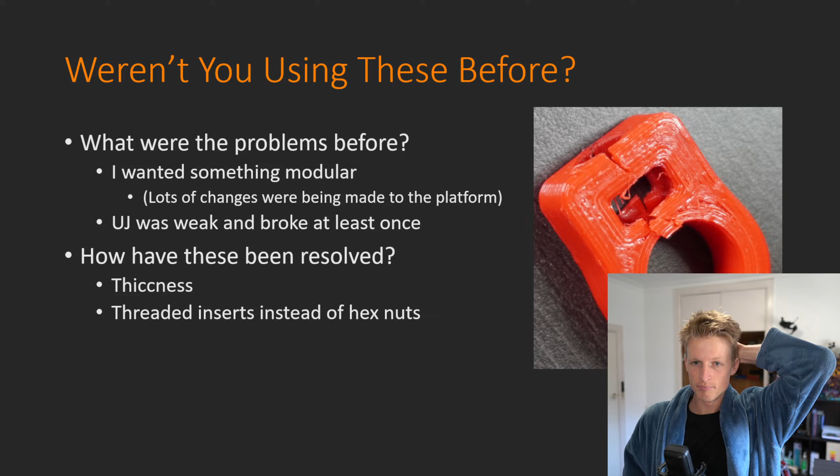I'll address this last question here, the contraction string, in a sec, because I think it'll make more sense then. I didn't have as much time this week—I was too busy cadding everything and kind of forgot about making the presentation, so things are a little weird. But yes, that's the first change I want to make: switching from magnets to these universal joints.

I think that will make things much stiffer, and I'll be able to actually pull and push much quicker. Also, in case you're interested, these have zero play in them. This joint has full range of motion—I can go wherever I want. This last bit twists, and it should have an extremely wide range of motion.

There is one problem I can think of with these: if they're ever in an orientation like this, they tend to not be very happy. I believe it's the same sort of principle as gimbal lock with Euler angles.

It can get a bit funny if everything's collinear, but hopefully that shouldn't happen. I've moved everything around in the CAD quite a bit, and it's only in very extreme situations where this happens. So I think I should just be able to avoid putting things in that position, which is a bit of a non-solution, but it'll do for now. If that ever happens, we'll just deal with it then.

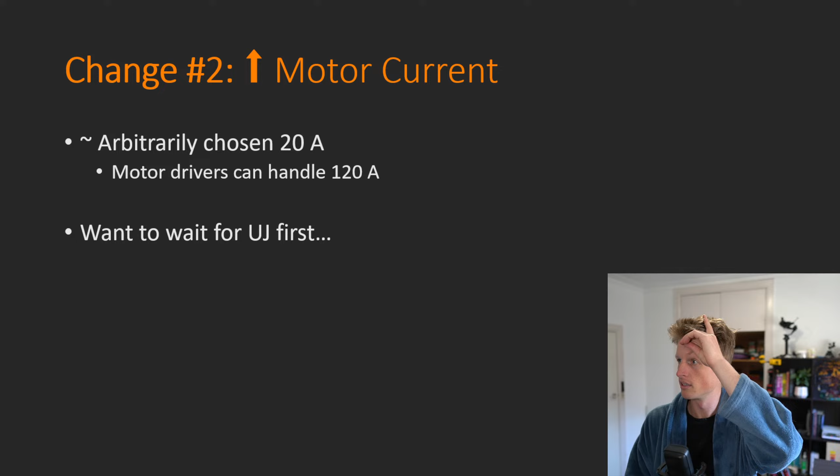Running into stop travel limits. I might go into the comments at the very end, I think it'll be a little bit less distracting for me. So that was the second change. Should be pretty easy, just change that number up.

I'm thinking the only niggle in the back of my mind about this one is that this may lead into more problems with the brake resistors again. Thinking back, this might be the reason why I set this limit to be what it was, the 20 amps, because if I have it any higher, they'll be putting more power into the motors, which means when the motors are slowing down and stopping the inertia of the robot, they need to dissipate that power somewhere. And that power has to go into the brake resistors, which I don't have any.

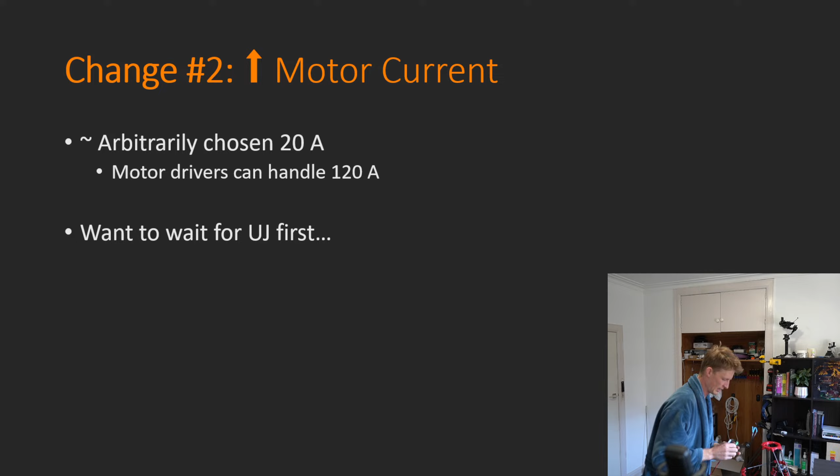Actually, I do now. I think I broke one of them before, I don't know, it seems to be going a bit weird. But I've now added these heat sinks to them, and I think this should be a lot better at dissipating the heat. But this is my only real concern with upping the current, is that I may need to be a bit more conscious of what's happening with my brake resistors. It's a bit concerning that I might have broken one as well, because I only have 4 and I need 4 now. No more spares.

All right, the third and final change that I want to make - this has been a bit of a contentious point within my own mind and also in discussions with people - but I think the hand motor ought to return. I had a hand motor like a year ago or so. I was very confused by all the inverse kinematics. I was umming and ahhing for a long time about whether or not to include one, and previously I decided that I wouldn't add one because it just makes the inverse kinematics so much more complicated.

However, I have since had a very useful and insightful conversation with Burrage, who is a professional juggler. He saw my live stream last week and thought, all right, I need to have a chat with Harrison and let him know my thoughts as a professional juggler. And that was a very good conversation. I actually want to show you now a short clip from our chat.

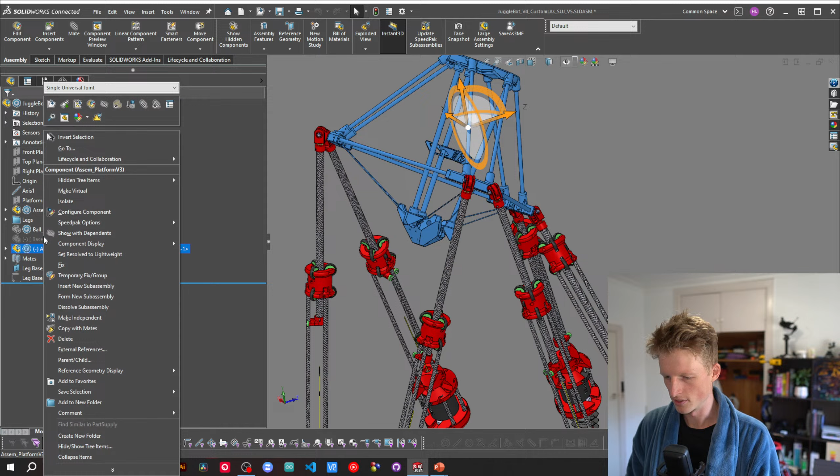And the other arbitrary thing is the length of the cage part for the hand. So it might make more sense if I show you this in CAD. Let me bring this down here and open this up. The length of this part here.

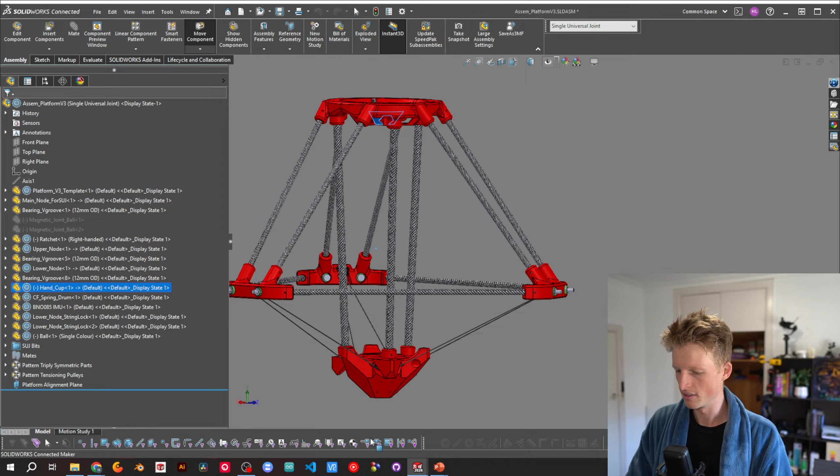It was kind of intuition, kind of just playing around in the CAD and hoping that things, seeing what doesn't make collisions happen easily, was basically it. But this length of where the hand can travel through was fairly arbitrary.

And now both of these two things are the same thing, because as the hand moves through, if the platform is only moving along here to here, the hand is at the top of its stroke and it can move down to the bottom of the stroke, which is the bottom of that hand cage thing, whatever you want to call it, and it can only move within that range.

The more-or-less part here is that as the platform changes orientation, that Z distance will change slightly, but only very little. And so those two things are effectively now the same thing, which feels good to me.

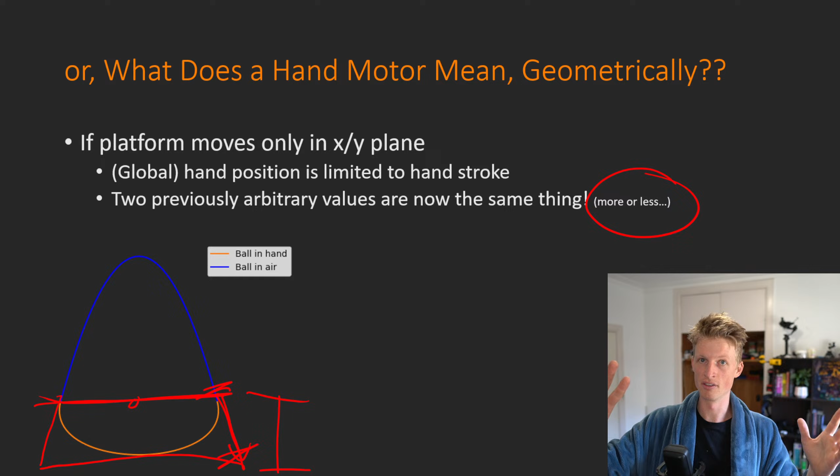This may just be because I'm too in the mindset of when I was doing engineering at university. But I remember it's always a very satisfying feeling when you have some complicated equation or set of equations and you realize that two of your unknown variables are actually the same thing, or you can just get rid of one of them. Whenever one disappears, it's nice because now you have less uncertainty and it's easier to understand how different variables affect one another when you have fewer variables to deal with. I think this is good, this feels nice, feels natural, you know? Maybe not, I don't know.

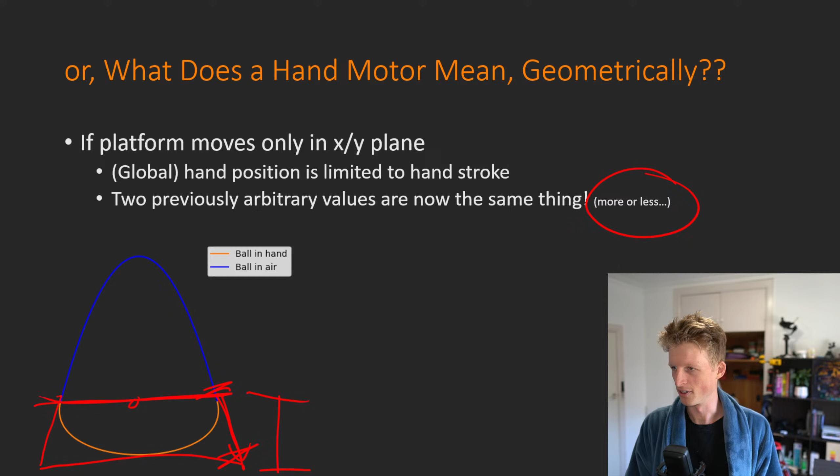So what does all this look like? Let's go into CAD now, even though we were just in CAD before. So this is all the same as before. You can see I've now got the new joints in place in the platform.

Oh, what do you want? Yeah, so we've got our new joints in the sides, and you can see even as I move this around, we don't really need this to be so big.

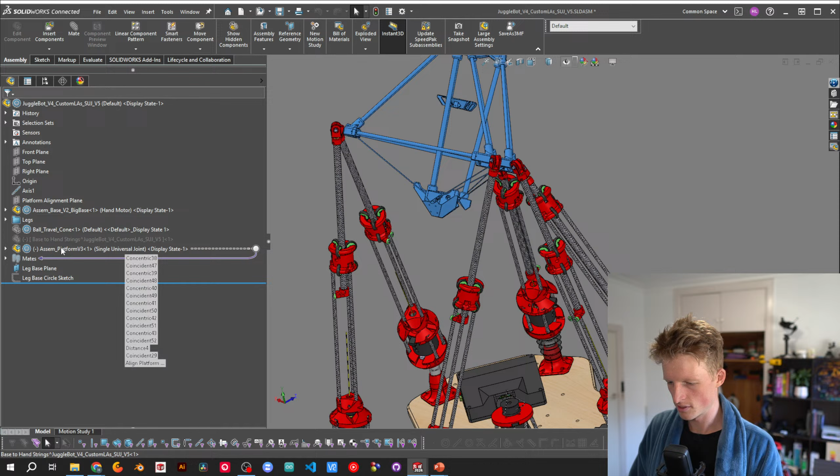As I move this around, I don't know if this is going to be too happy doing this, to be honest, while I'm streaming. But all of these joints, I have not been able to put this in a position where the joints seem super unhappy. So I think this should be fine.

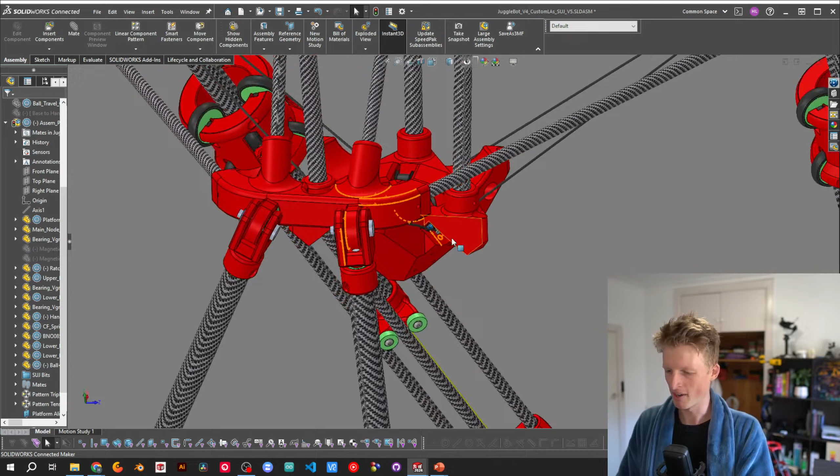I could also play around with, and I was considering doing this, the orientation and position where these joints meet up with these bigger bracket bits, main nodes, I've called them. I could play around with that, and that would maybe help if I find that in certain positions the joint just breaks or something. It might be worthwhile changing that orientation to alleviate forces when it's in that position.

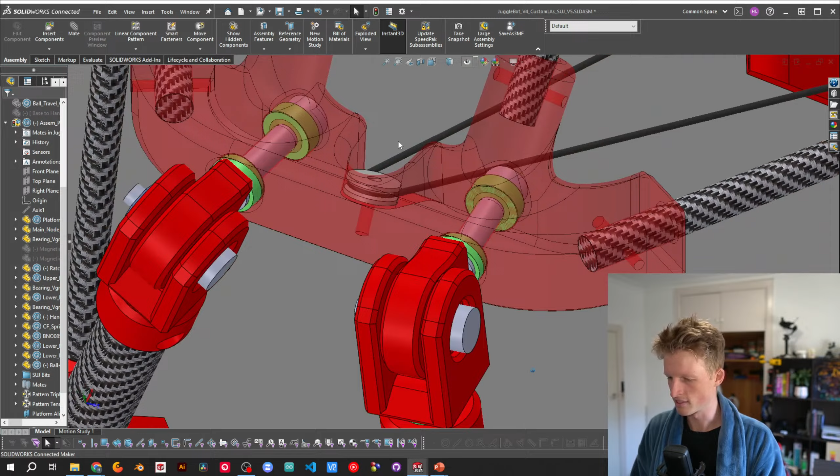But I think this is a good, simple option. To be honest, I mostly just did this because this was the simplest option, because these things don't have a whole lot of space inside them. There's a lot of other things going on in there, and these were just the thickest bits because these other sticky-outy bits are there. And so that just gave a good mounting spot, and it keeps most things the same.

One thing I'll mention now that I'll probably forget, and I ought not to, but we'll see, is that because these joints are slightly different to the magnet ones, I will have to go back into ROS and change all of the geometry of the robot. It may not be super obvious immediately, but if the geometry changes at all for the whole Stewart platform, the inverse kinematics are affected quite a bit, proportionally to that change.

And this change is non-insignificant. The whole platform drops down a little bit, the connection point moves out a little bit, and I will need to make sure I go in and update those because I haven't yet, and I could see myself forgetting, to be honest.

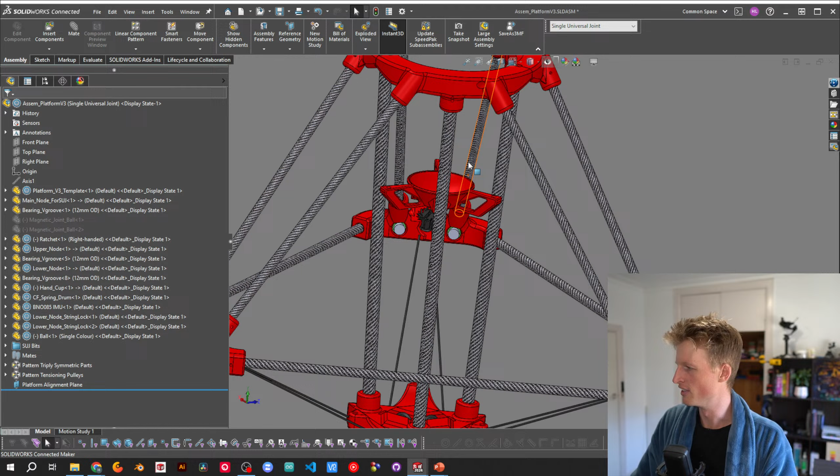Okay, so that's that. But now we've got a hand motor, and just to describe this problem fully, let's open the platform back up. I haven't actually included these in SolidWorks because they're a little bit annoying to deal with since everything moves around so much. But there are 3 strings, and you can see one goes into this hole, one goes into this hole, and one goes into this hole over here.

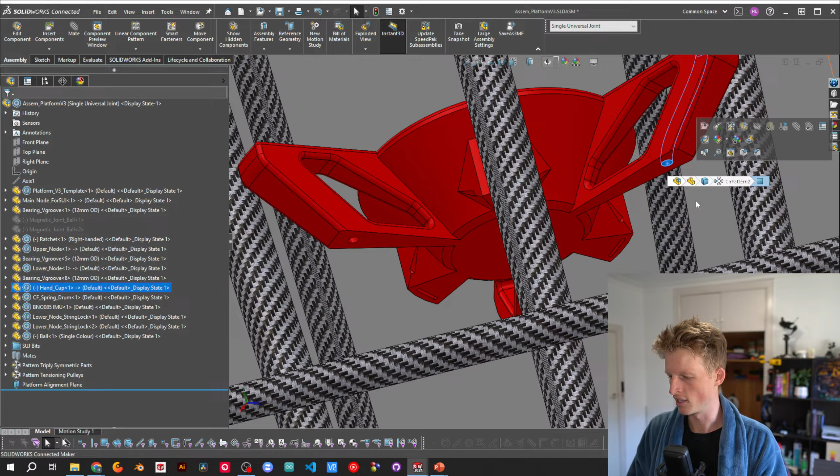These 3 strings are completely independent from one another, but I need them all to be the same length because they tie in here and tie off down the bottom. I just put a knot in the bottom so they can't get pulled through. Then that goes up over these pulleys, straight down into this hole, in which there is a PTFE tube, so it's not quite as large of a hole as it looks in CAD, because I haven't included the PTFE tube since it doesn't really need to be there. That then comes out the bottom and out of here.

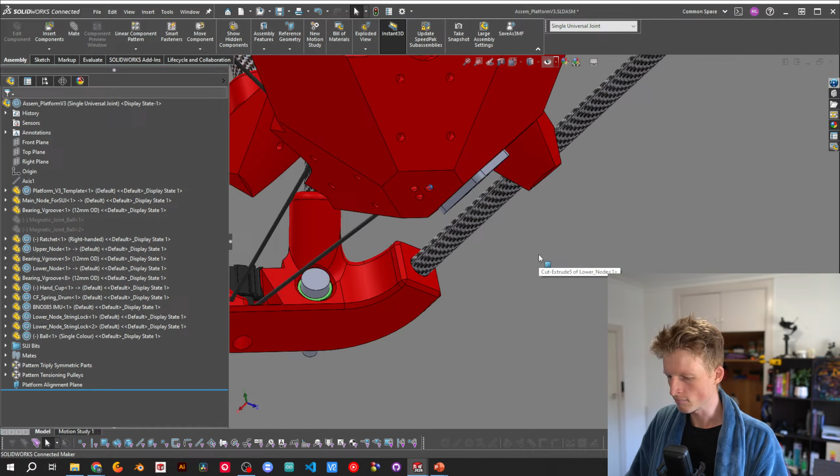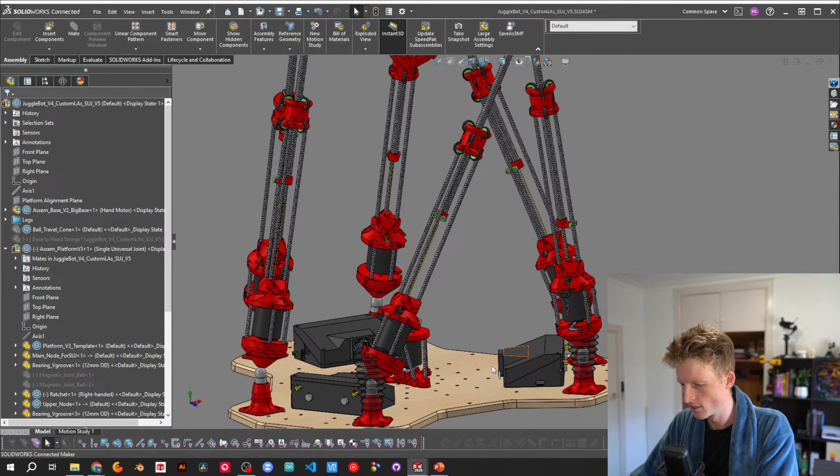And that's where it leaves the platform. And then those 3 go down, and previously - there's a bit of a spoiler, I'm going to cover that up - it looked like this, if it will load. Come on, it doesn't want to change.

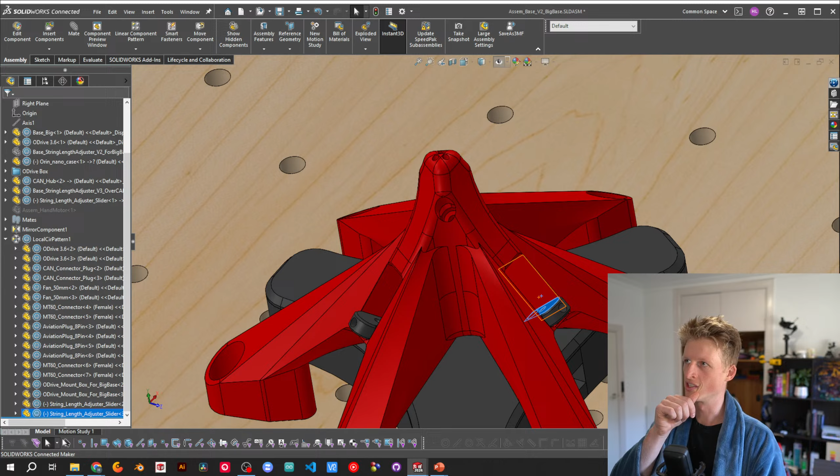But previously I just had this thing here, where the strings would go in, and using these little sliders in here, I could adjust how long that string is relative to the other ones. Because at the end of the day, the attachment point on the hand is just a knot, and the attachment point at the end of this little adjusty thing is also just a knot. I have learned the hard way from experience that I cannot tie knots in a millimeter precise position. I would be impressed if anyone could.

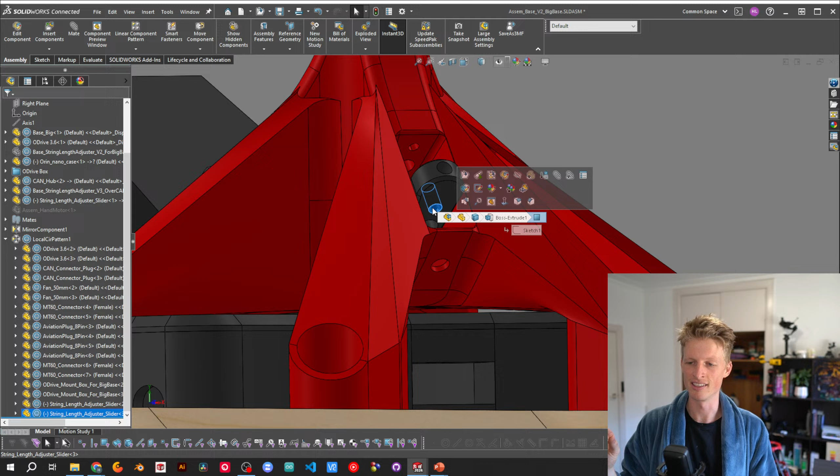So I realized I need some way to adjust the length of each of these 3 strings because they need to be exactly the same. If they are not exactly the same, the hand will pull up at a weird angle and will not be straight, and that will be very annoying to compensate for in control, software, and everything.

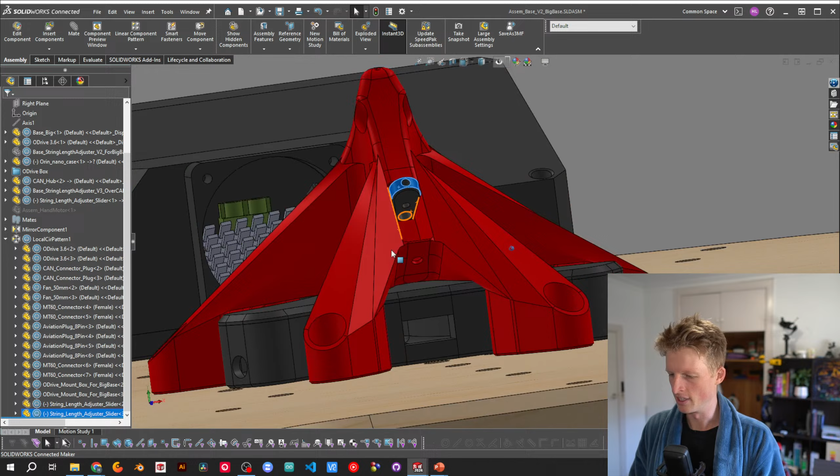So my solution before was that I had these 3 little length adjusters. Obviously they don't move together, they just move that way because I'm lazy and I just circular patterned them in the CAD. There was just a bolt that came through here, goes into a threaded insert, and that slides this back and forth. That works really well, giving me about 20 millimeters of play on either side, which is enough to get them all to be exactly the same.

One thing I'll mention is that something I really liked about this design, and what really helped me get these 3 strings to be the exact same length, is that I could raise the hand up so it was pretty much at the very top of its travel, and then adjust these one at a time until the hand reached the top of its travel.

And by having the tensioning mechanism down at the base, it made it a lot easier to adjust the height of the platform than previously. A while ago I had the tensioning mechanism in the hand itself, and that's a little bit harder because when I'm screwing to adjust, I'm applying forces to the hand, and I can't as easily see what effect that tensioning is having on the hand position since I'm pushing onto the hand. So ideally, the tensioning mechanism is on the base and the hand is just doing its own thing.

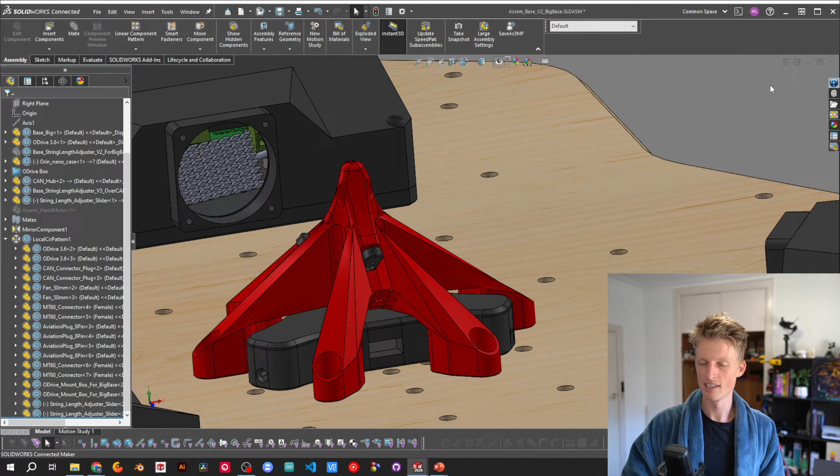With that said, this is my plan for the hand motor now. It's a pretty space-agey design, I think.

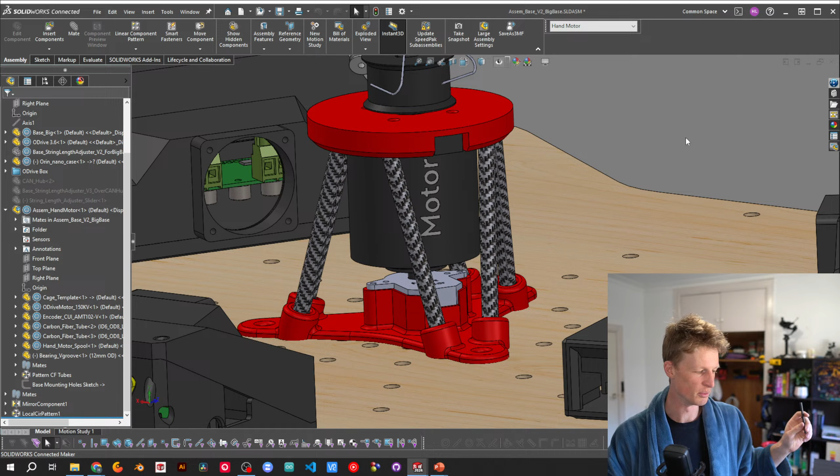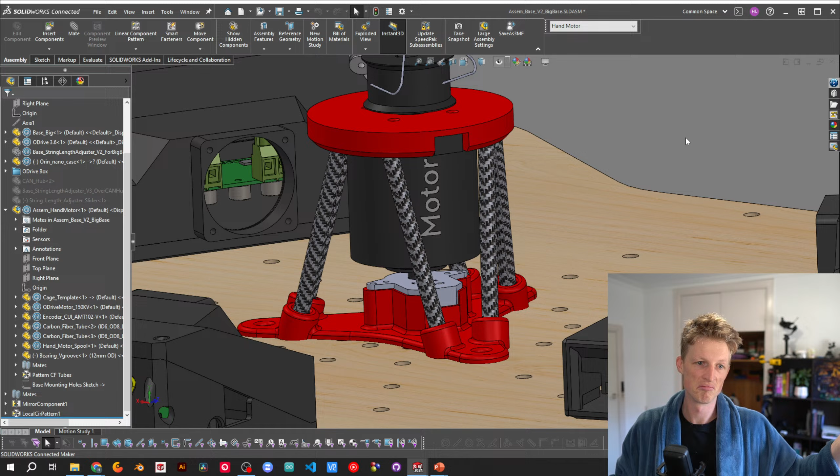Most of the reason I'm doing this is because I have a bunch of these short lengths of carbon fiber tube left, since I bought an extra set of all the tubes I needed for my actuators. For a while I had 7 of these actuators just in case one broke, so I could quickly swap in another, which was cool. But I've since used some of the extra tubes for the platform because I didn't want to buy more, and now I don't even have enough spares anyway. So I figure I may as well just use all the rest of my spares since I don't have enough regardless.

So I wanted to make use of these tubes, and I wanted a design that looks really kind of sexy, which I think this does a little bit, at least to me.

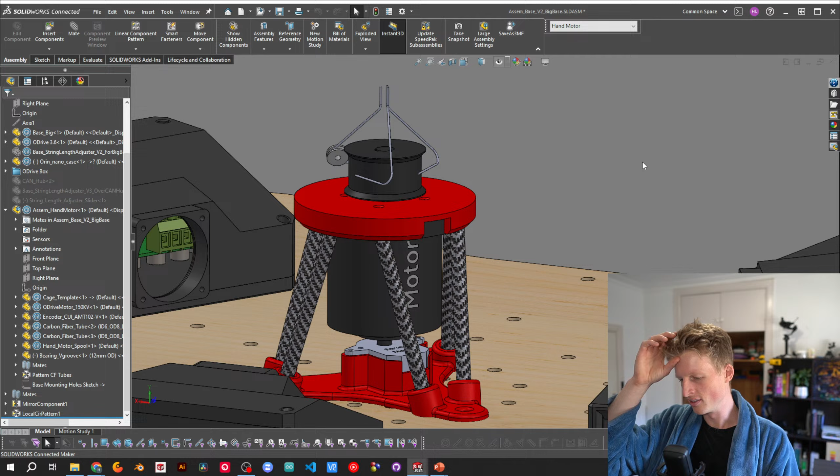But the thing is, I have not yet figured out a way to route the strings so they go around this spool. I spent quite a while over the last couple days trying to figure out some way to put the tensioning mechanism, or length adjusting mechanism, in here somewhere. But I could not figure out a way to do it that would look nice and actually work and be manufacturable.

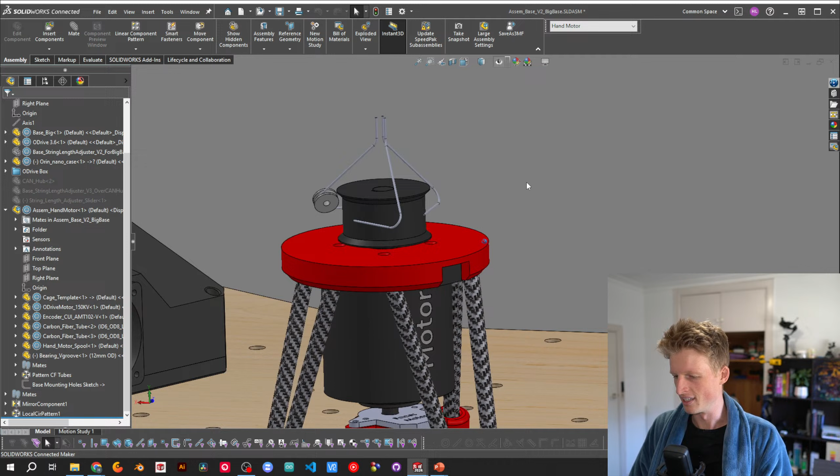I haven't had enough time to CAD this because I just thought about it yesterday, but what I've committed to now is having this routed the same way you can see here. I'll probably offset the 3 strings so they wrap around this spool at different heights so they don't interfere with each other.

This is something I've been thinking about a lot: if I have 3 strings wrapping around the same spool at the same position, will that work? Will they tangle with each other? I don't know, but it feels safer if they're stepped a little bit. I did consider making this spool 3 separate spools so each has its own individual channel to run into, but I don't think that's necessary.

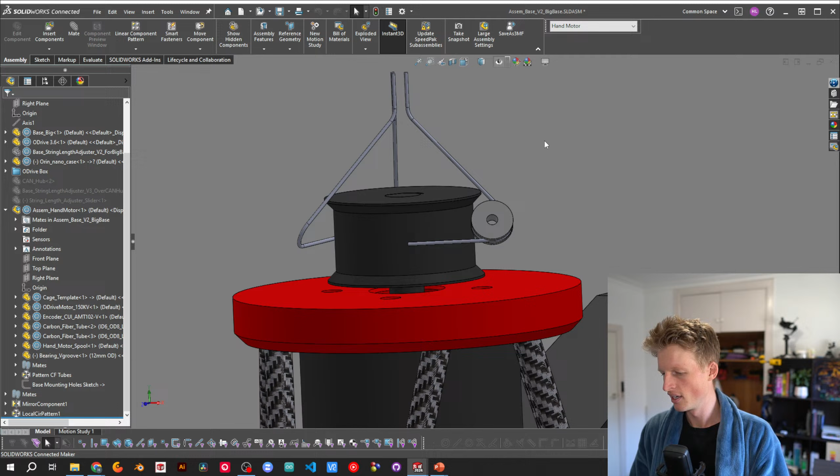Keep in mind, with the size of this spool, the strings will only wrap around about 2.5 times, so there's not a whole lot of wrap, and the strings are thinner proportionally to the spool than they look in the CAD here. I've just made them this size so I can actually see them more easily.

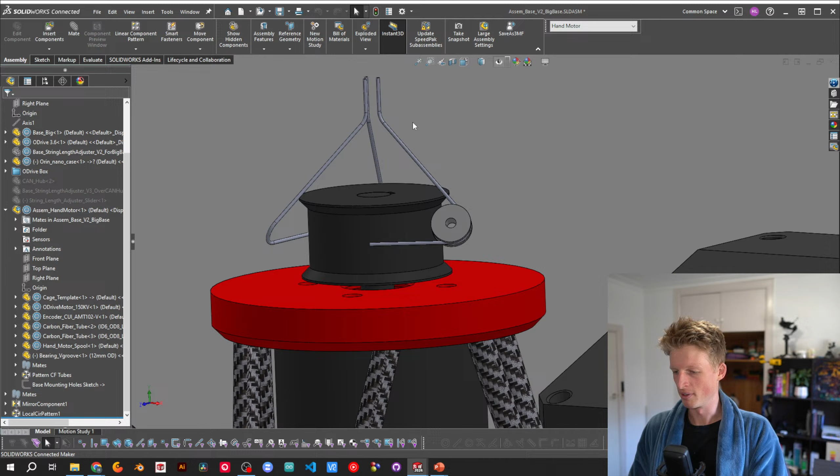So if I'm not going to put the tensioning mechanism here, there's only really 2 other places it can be. It can be in the span between this point here and the hand, at the bottom of the platform, which feels dangerous because there's only a very small amount of string there that doesn't go fully into the motor or fully into the platform up above.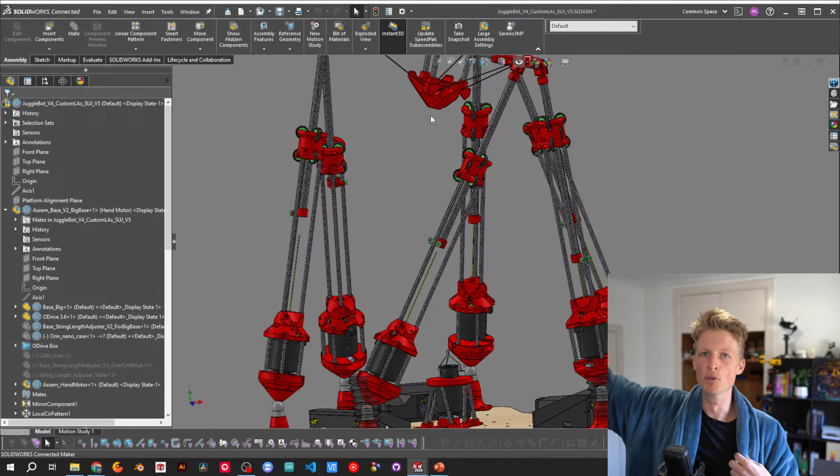There's only like 5 centimeters or so, and if I change the geometry of the robot around a little bit, there won't be any string that doesn't move into some tube somewhere. So it really can't be in that middle span.

That leaves the only other elegant option being in the hand itself, which I'm not super happy with because of the problems I mentioned before. While tensioning these strings and getting them all the same, it'll be a little tricky to get them perfectly identical because I'm pushing against the hand while making these changes. But I guess I'll just have to figure it out.

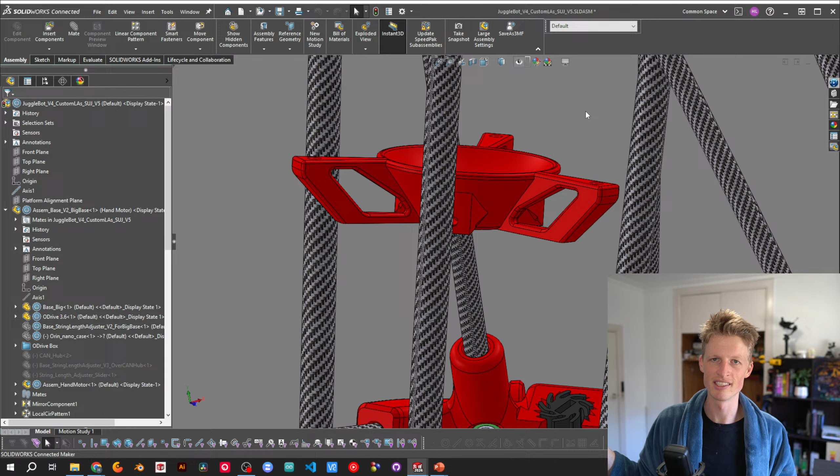The saving grace is that I only need to do this once, and as long as nothing breaks, it will stay the same for a while. That's really the only reason I'm okay with putting the tensioning mechanism on the hand. If this was like the legs and I had to do this 6 times, I'd be more incentivized to spend more time trying to get the design to work down at the bottom.

But I can't figure that out, so I don't know.

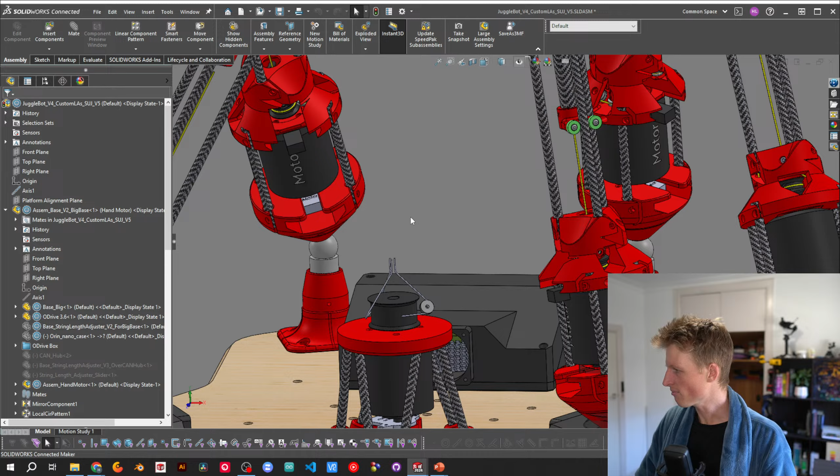There's one other thing I'd like to add: the calculations I've done for how much oomph this hand motor can give to the ball, just by itself with this diameter spool, show it should be able to throw the ball. I had to restart my computer so I don't have it open anymore, but I believe it was about 1.4 meters, which is pretty high—higher than I need to juggle 5 balls. So that should be pretty good.

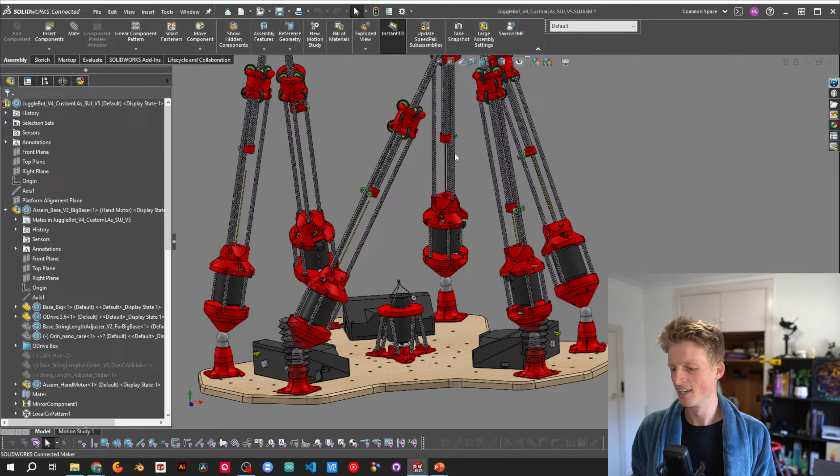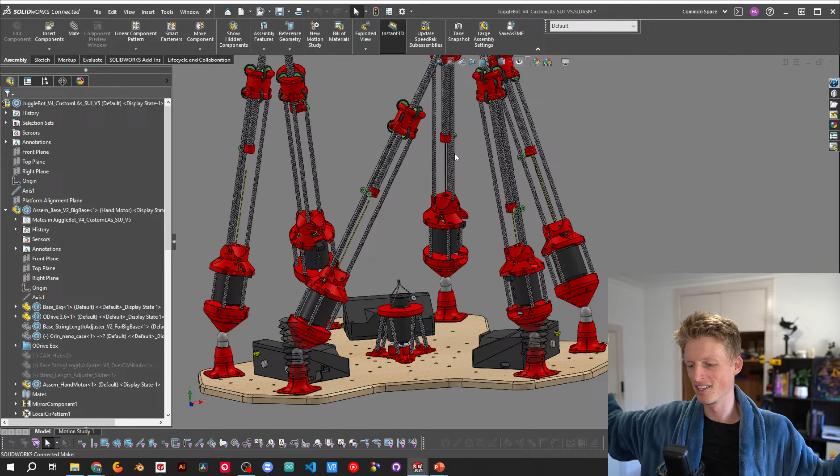But the problem is that it's accelerating as fast as it possibly can. Actually, it accelerates very, very fast until the mid stroke of the hand, then immediately decelerates. If it spends a little too much time accelerating, or doesn't decelerate fast enough, the hand will reach the top of its position and something will have to give. I have no idea what that will be.

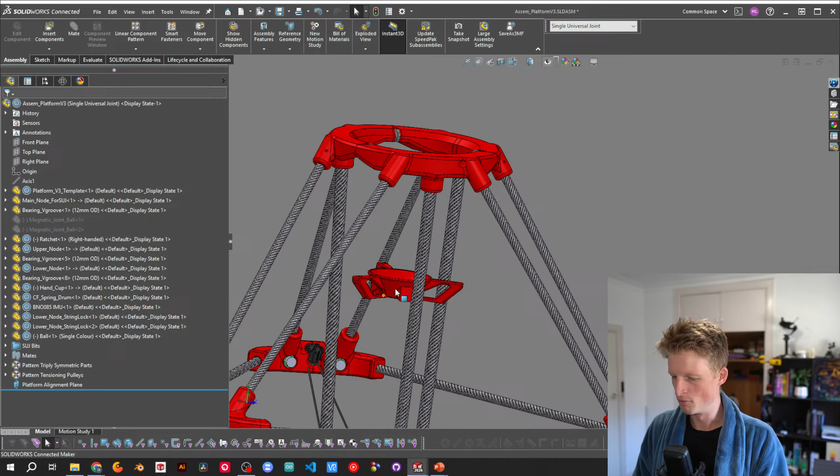This whole system here feels pretty strong. Obviously there's nothing actually holding this together right now, but I intend to make this part reasonably strong, with a big asterisk I'll get to in a sec. The rest of it is all super strong. If we go into the platform model, you can see when the hand moves up, at the very top it actually makes contact with the top face of this part against the bottom under here. It doesn't actually touch the pulley—the pulley's a little bit in, it's kind of hard to see, but it makes contact with these 2 flat faces here.

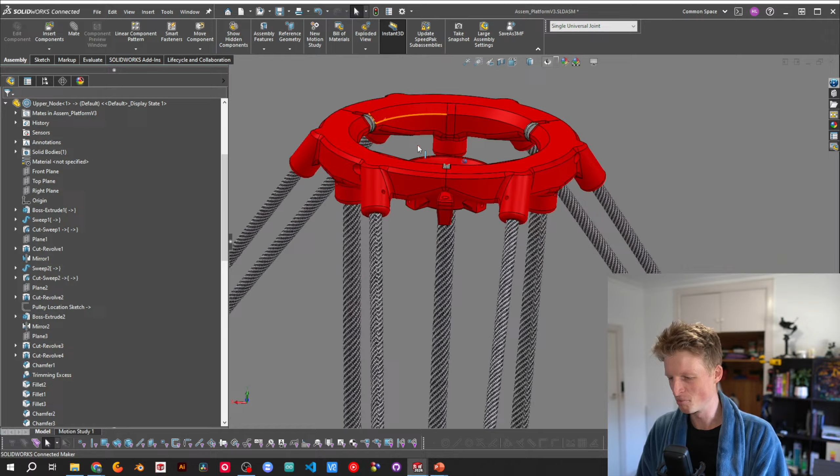I don't know what will break in this case. The pulley is held in pretty well. This part is solid, where all the tubes are routed through. I have no idea what would break.

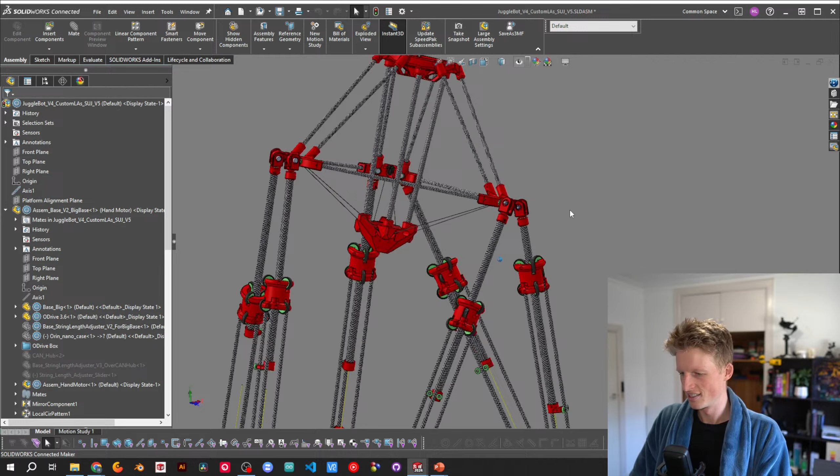So what I would like to add is some kind of mechanical fuse. I don't know what this is called normally—shear pins is a similar sort of idea. I basically want something where as soon as the impulse is high enough, this thing will break and stop other things from breaking. I'm not 100% sure how I'm going to do this yet, or if I will. I've had a bit of a think about different mechanisms, but it's a little bit tricky—I can't think of a good spot to put this sort of fuse.

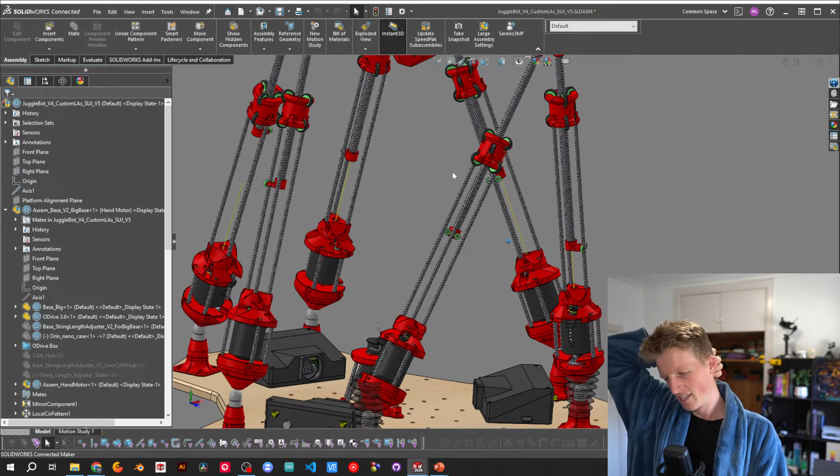I think maybe a good spot would be in the length of the strings themselves, but then there's the same problem: they're going to get sucked into the motor, or they'll need to go up into these tubes in here. So I don't know. A mechanical fuse would be nice, and to be honest, I have a sense that if I don't put one in, I'm going to regret it because something will break that I won't easily be able to replace. But I can't think of where to put one, so I don't know.

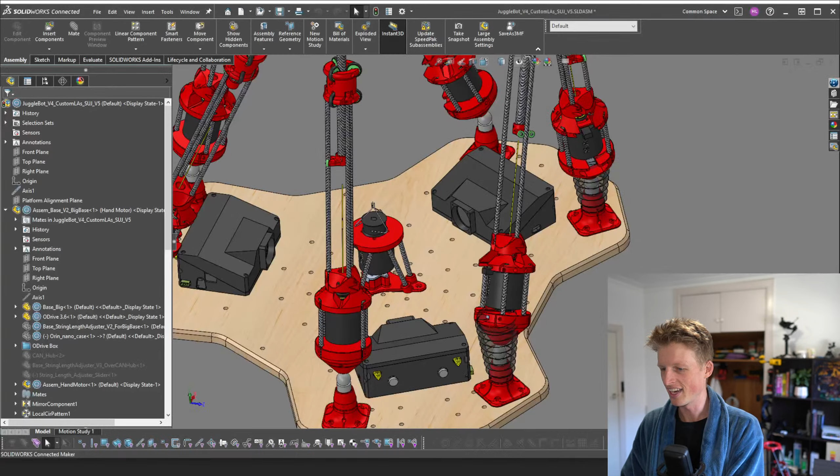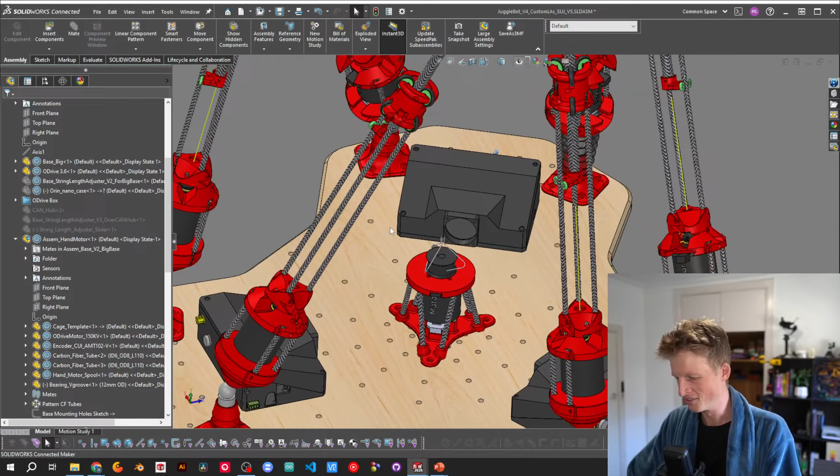We'll see. Another thing is that in the CAD, or in the robot right now, we have 6 motors and 3 ODrives, because each ODrive can command 2 motors—one connects here and one connects here. So we have three ODrives to power 6 motors. I am now adding a 7th motor, which means I need to add a 4th ODrive. This really messes with the symmetry of Jugglebot, which is really pissing me off. I didn't anticipate having to do this when I made this design, and I love how symmetrical all of this is—it's so satisfying. But I need to add a 4th ODrive somewhere. I'm thinking I'll just copy the same box design because it works and it's simple, but it's going to have to go over here somewhere, and that's really going to add some spare bulk.

That's a funny idea, actually.

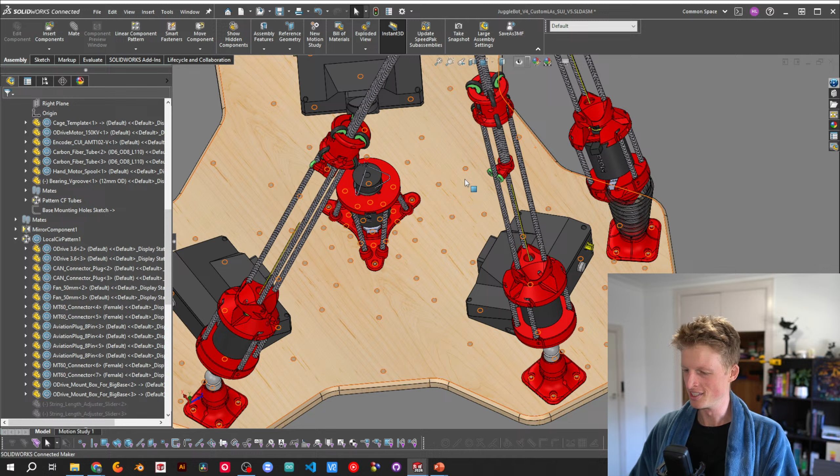For better or worse, and definitely for worse in this regard, I actually won't have any spares now, not because anything's broken, but because I'll be using them all. My plan was to have 6 motors, 3 ODrives, and I was going to be proactive and get a 7th motor, a 7th encoder, and a 4th ODrive as spares, so if anything breaks I can go back down to 6 and everything will be happy.

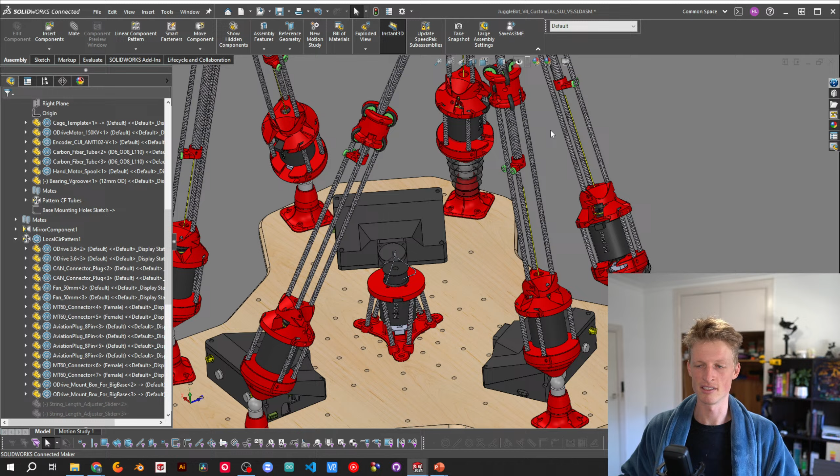But now I'll have no spares, these are all of them that I own. I don't have any more motors, any more encoders, or any more ODrives. So if any of these break, Jugglebot is pretty screwed, to be honest. Let's just hope that doesn't happen. I haven't broken any of them yet, and at the stage I'm at now, it's pretty unlikely for one of these components to break.

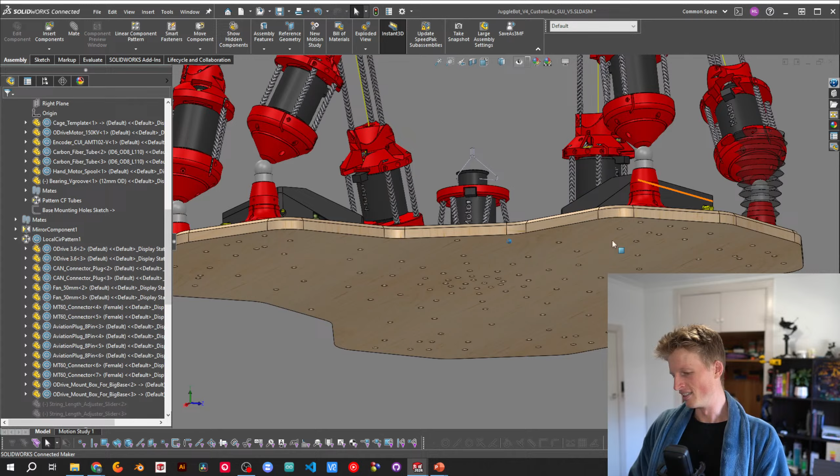Putting it underneath, I don't know. This is flat on the ground, and Jugglebot has a good bit of mass behind it. I think having something underneath might be more annoying than it's worth, because having this flat is nice—I can slide it around on my carpet, but if anything stuck out, it would catch and screw up the carpet.

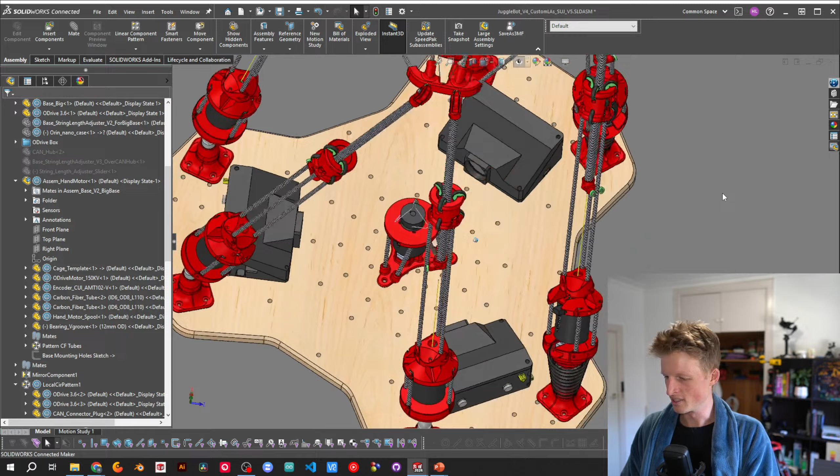Fake O-drives, I don't know, we'll see. I think I'll just have to commit to ruining the symmetry, but we'll see. I don't even know if one of these boxes will fit—let's see. I don't know how nice it will look. Oh, go away. So this is on here. Come on, going that way.

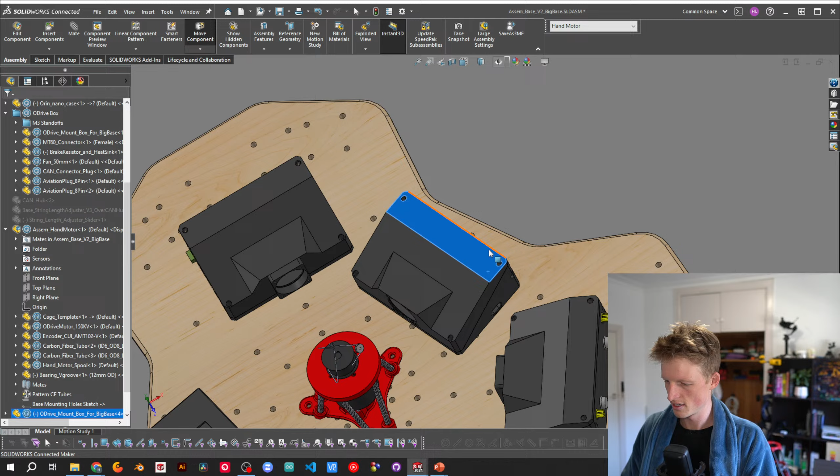Actually, maybe this can be a good opportunity. This is the Jetson that's powering the robot, and I just kind of have it dangling around—it's not actually attached. Maybe I can attach it over there. That doesn't look too bad. I don't know, we'll see, I'll have a play around with it.

Yeah, let's get rid of you. Yeah.

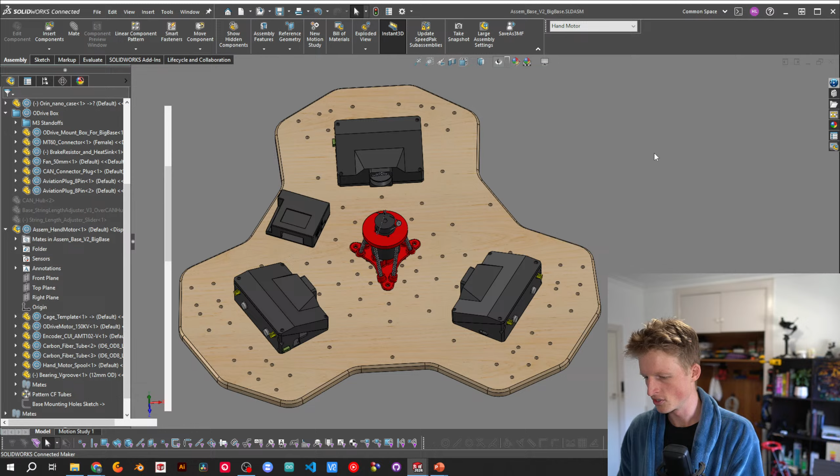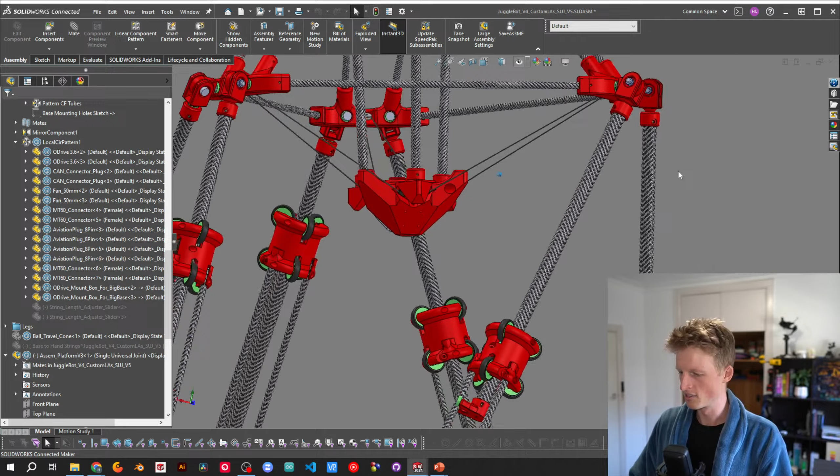So yes, I need to make some sort of things for that, and I need to install all the bits. I've got all of the parts printed now for all of the new joints, so I'm ready to install these, but part of me wants to wait until I've finished the hand motor design and printed those bits off, to do it all at once—because when I make these changes I have to replace the nodes on the platform, which means de-stringing the whole thing. These strings, well this one string, since it's all just one, I'll need to take it all out and basically remake the entire platform, as well as restringing the legs, which I actually want to talk about in just a sec.

It feels like it will be simpler—I'll only have to do that job once if I do everything together at the same time, because then I can restring the hand as well at the very same time. So I'm kind of wanting to wait until the hand motor design is done, and then I'll just do them all in one go.

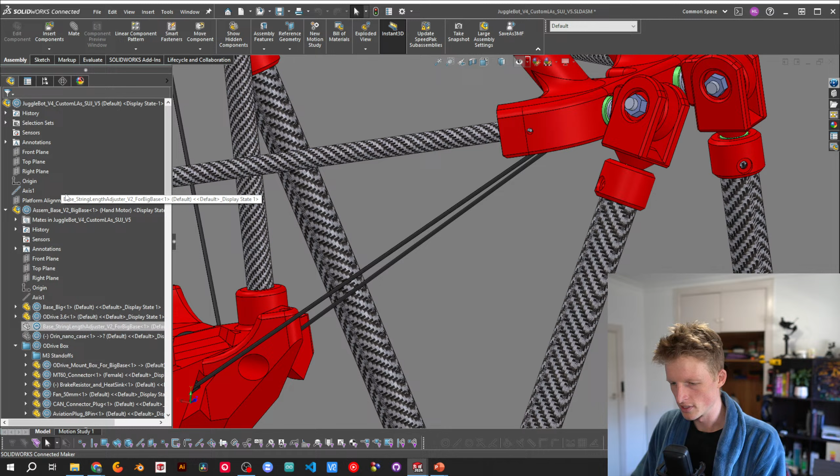But I'm expecting that to take a while, because one of the annoying things about this new joint design—if I can find where the legs are, there they are. Yep, sure.

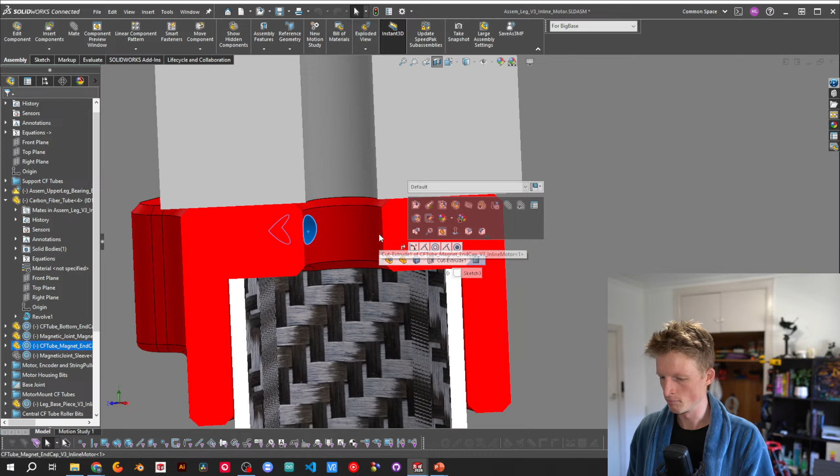Previously, when we had the magnet joints—let's see if I can still open this up. Yeah, cool, okay, so here's the magnet one, and if we take a cut through here, we can see there was a hole in the middle. This was cool because it meant I could put the string—the string that pulls the leg down to make it shorter—all the way up through here, through this little hole in the plastic part, out here, and then terminate it with a bolt. That was pretty easy, relatively straightforward. The string didn't need to go the whole way through; all of the string from the bottom part up to here doesn't move, it just stays inside the tube the whole time, never changing.

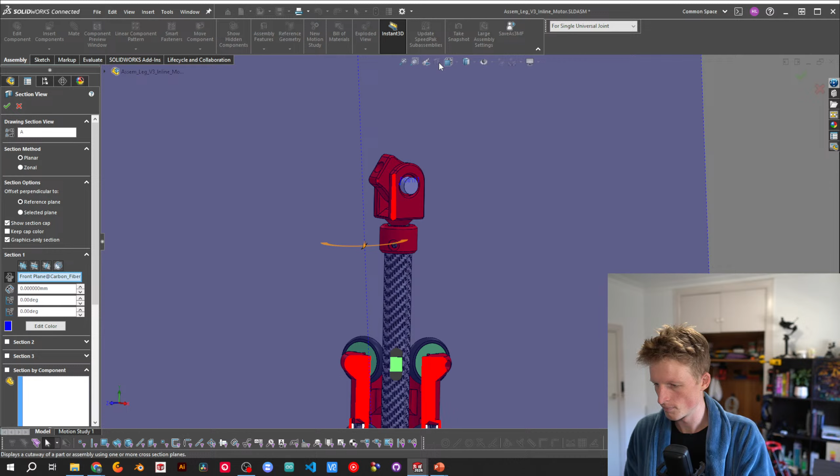But now that I've got this joint here, let me do a cut in here.

There is a bolt running straight through the middle there, and that means I can't put the string through. I could drill a hole in the side of the carbon fiber tube and string it up around the outside, terminating it there. Maybe that would work. But a simpler option, in my opinion, is that I've changed things around so the string now terminates in this bottom piece.

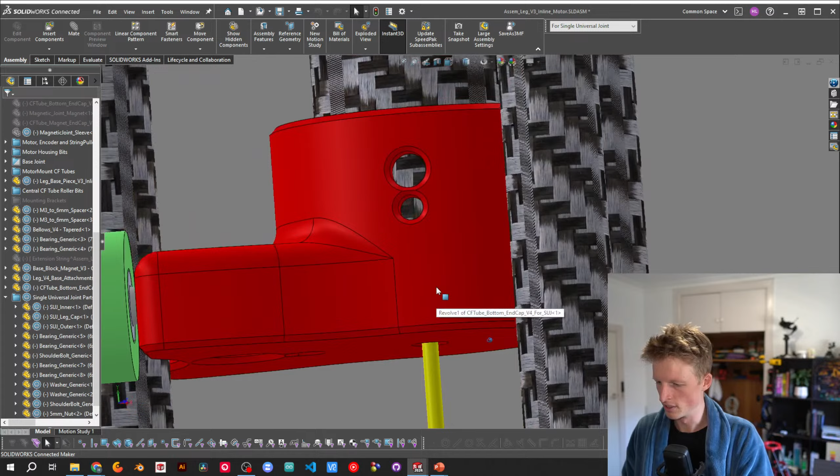So if we get rid of this, the string will go up through this very small hole, out through one of these, which I'll have to drill through the carbon fiber tube and the bolt. I don't have the tools for that.

The string will come out through here and terminate in here. And this is all well and good, except there's always an except. Before, when the string went all the way through and terminated on the end, these cap parts on the central carbon fiber tube didn't need to be firmly attached, because the string pulling the tube down was pulling on this cap, clamping it into the tube harder. And the string pulling the tube up was connected to the bottom piece, which also clamped it in. So the strings were holding the caps onto the tube, which was nice because it was basically an interference fit - just slide them on and they stay.

But now this top one isn't doing anything as far as the strings are concerned, and this bottom one is doing both jobs. So when the leg is pulled down, this cap is being pulled off of the carbon fiber tube, and if I used the same interference fit as before, it would just get yanked off. That's obviously not ideal.

So now I've taken the approach that I used on all of the platform parts where the carbon fiber tubes go in, which is to drill a small hole into the tube, guided by the hole in the printed part, and then put a bolt straight through the lot. That's been absolutely solid on the platform, so I figure doing the same thing on the legs should be fine.

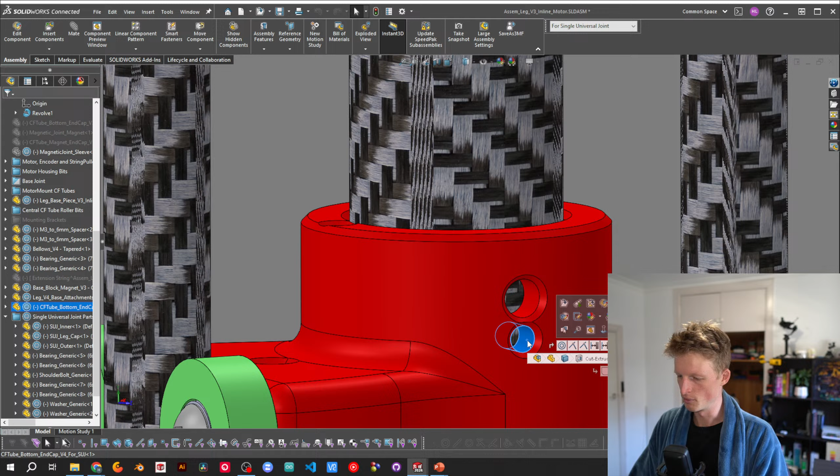This bolt that comes through will also terminate the string - it'll come through and wrap around the bolt a couple times. That bolt will also contribute to holding this printed part onto the tube. There's also one on the other side, or if I'm feeling like it, I might just have one super long one go the whole way through. Let's see, I don't actually know if I have a bolt long enough for that.

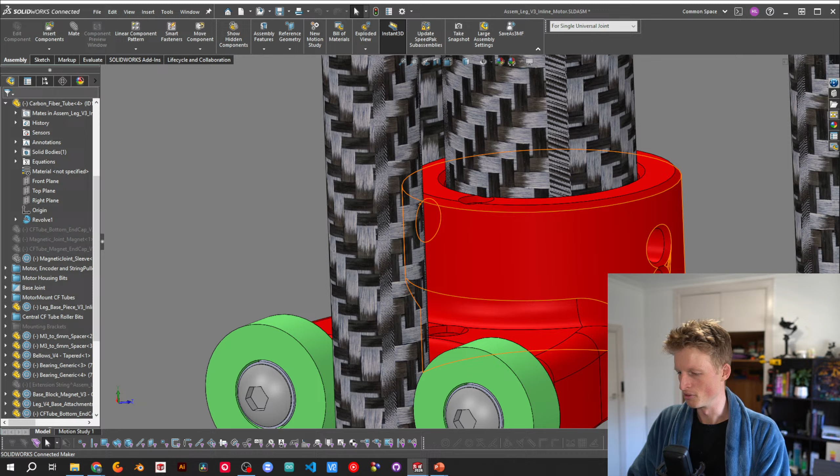In any event, I need these bolts here, and I'm also putting them on the top because if the magnets were being pulled off the platform before, this joint would definitely get pulled out if I didn't have something firmly attaching it. So there'll be the same deal - bolts through here to fix this printed part onto the leg. Hopefully everything will be super stiff, super held together. But we'll see.

After installing all of these things, I'll have no more spares. So fingers crossed that nothing breaks.

After all of these bits are installed, I'll need to figure out the new kinematics. As I said, I think I'll keep it super simple - just move, throw, move, catch, move, throw, move, catch. I have pretty high expectations for this. If this can throw the ball over a meter high, I have no question in my mind that this version of Jugglebot will be able to do 2 balls in one hand, which is officially juggling.

For those curious, juggling is when you have more objects than hands throwing the objects. So one ball, one hand is tossing - it's not quite the same. Jugglebot will maybe actually be able to be a juggling robot because it will be able to do more balls than the single hand it currently has.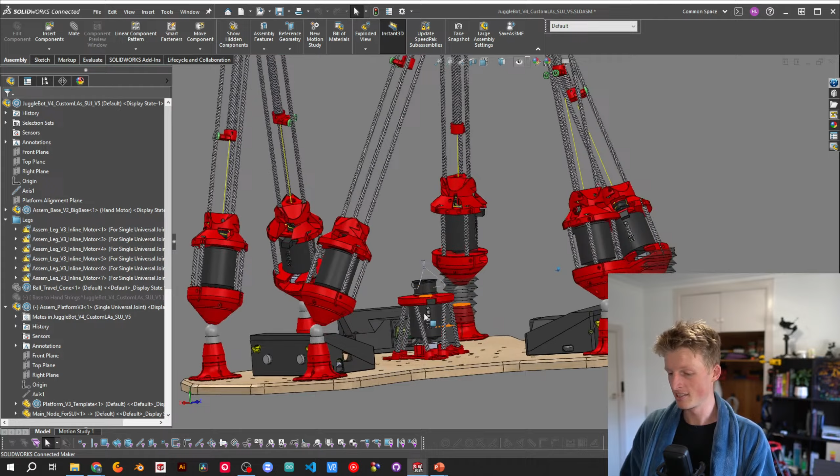If you're thinking about this sort of thing and trying to figure out a good way to do any of the things I mentioned, one thing I haven't mentioned yet is that it would be good if this hand motor design were strong enough to survive a ball landing on top of it. I don't know how I'm going to do that with the strings routed the way they're shown here, but maybe I'll just have a little deflection shield over it or something. I think it's very naive to expect that balls will not hit this, because already balls have tormented these electronics boxes, and they've done a very good job of surviving so far. So I think I'll need to do the same for the hand motor.

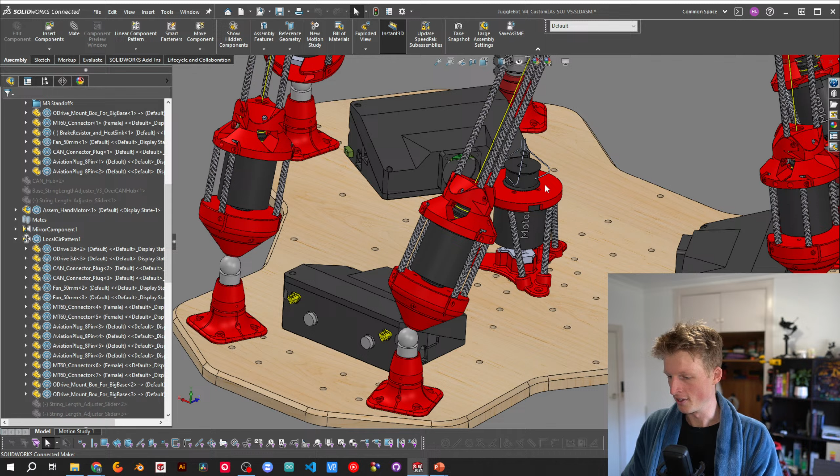Actually, comments first.

Jonathan suggested using a single string, then having rails for the hand. I'm not going to be able to find the design where I did that right now because my project management is not the best, but I did have a design at one point where the hand was guided by linear rails, and I still had 3 strings I'm pretty sure. A big problem I had with that was actually aligning everything, because the prints have a little bit of tolerance in them, and these linear rails, at least the ones with the linear bearings that I had, require very, very fine tolerances. It was just getting jammed in certain positions. Those rods, I couldn't keep perfectly parallel for their entire length, and it was just getting jammed up. And I still had 3 strings. I don't know how you could do that with just 1 string, because it would always add a bit of a bending moment to it. I may be misunderstanding what you're saying though.

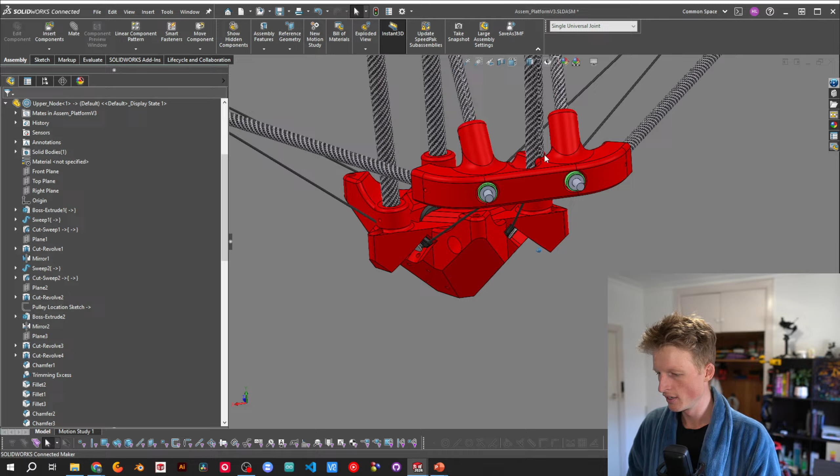Yes, you are right though, that during the throw testing, the hand wobbled quite a lot, and this is actually something I'm not sure how I feel about. Part of me is obviously concerned about it because the hand should not be moving in the middle of its position. If we go back to here, when the hand is at the very top, it's very well constrained, as you can probably imagine. Similarly, when it's at the very bottom, it's quite well constrained because there are 3 constant force springs around these 3 drums here, and they do a pretty good job of holding this down to the base.

But in the middle, which is what we saw last week, obviously in SolidWorks everything is nicely constrained, so it's going to only move straight up and down. But in reality, this is only held in place by constant force springs, which provide 0 lateral support at all, and strings, which also provide 0 lateral support. So this can actually move side to side by quite a lot. Part of me doesn't like this because I'm not controlling that side to side movement, and it's just kind of doing whatever it wants to do.

So it feels like it's not a good thing in that regard. But also, part of me feels like maybe it would be helpful because it will allow the hand to adjust a little bit better to the actual momentum of the ball itself. So if the ball's not quite ready to move in the way that the platform wants it to move, then the hand can kind of slide to the side a little bit to compensate for that. Maybe. I don't know, I'm talking out of my ass a bit here, but maybe. We'll see. In any event, I'm not hugely worried about it right now.